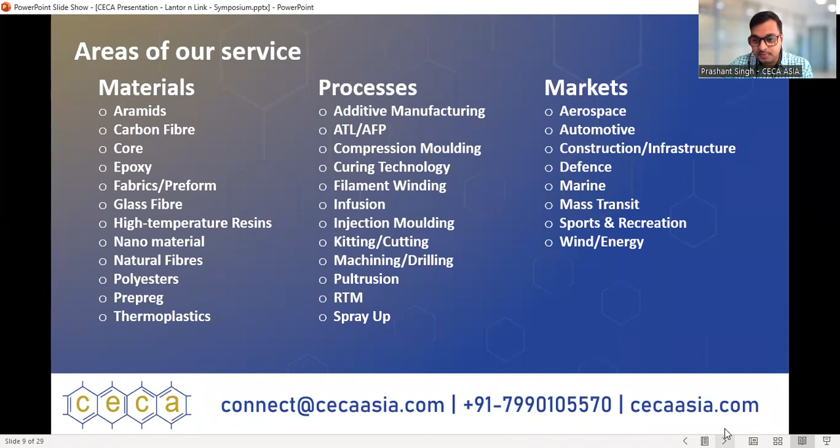If we talk about the markets that CECA Asia caters, it caters aerospace, automotive, construction infrastructure, mass transit, sports recreation, wind and energy, and much more. So this is the core support team of CECA Asia, including Dr. R.K. Singh, Mr. N.C. Sharma, Chindan Kunal sir, Dr. Anshuman, Frank Westy, and Hiral Nair.

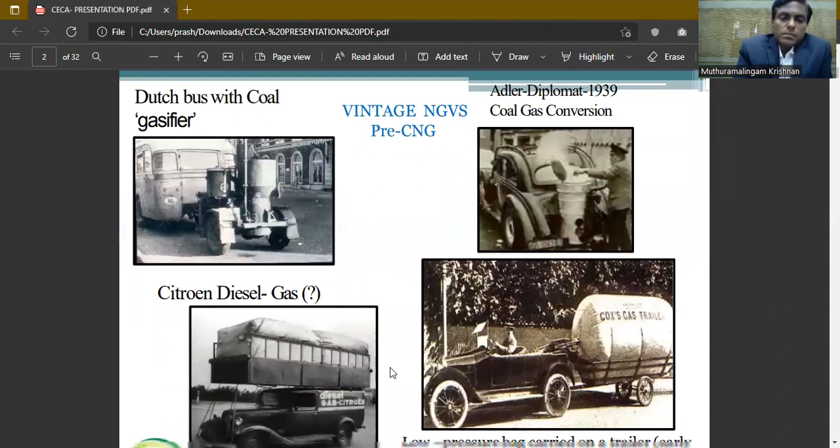When you look at the history of the market and CNG, you can see how we have reached here over the years. You can look at the vintage models and how they used coal gas conversion. Our technology is advanced today because of these vintage technologies that were implemented.

Now we are using composite cylinders. The first Type 4 cylinder was used in rocket applications in the 1960s, and in 1992 it was used in cars. So composite Type 4 cylinders; this is the way it has grown, the growth witnessed so far. Next slide.

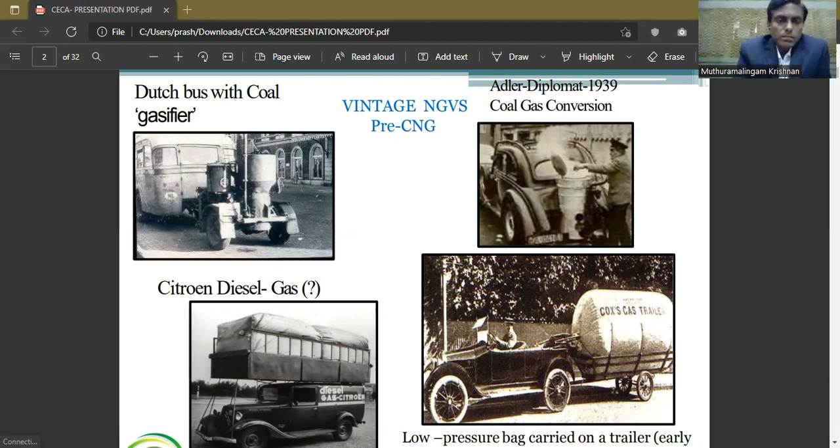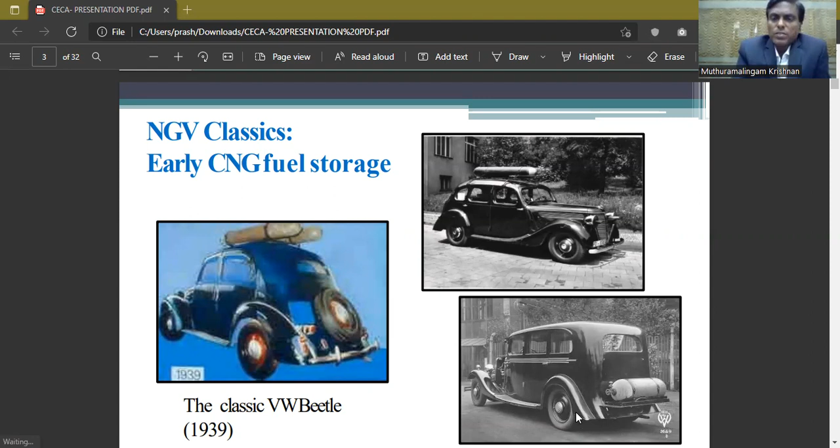Next slide, please. You can see the CNG fuel storage tanks. They used to keep it in metal ones. You can see in 1939, in those days, the heavy weight and how people drove with those gas storage tanks. It has come a long way. Over the last almost 80 to 90 years, we have seen them using gas storage systems. Next slide, please.

So this is the main type, whether it's a Type 3 or Type 4, so composite cylinders. Nowadays we have to go with carbon fiber. We cannot ignore carbon fiber at all, because it reduces the thickness and gives very good properties.

The carbon fiber properties: high modulus of elasticity, high tensile strength, high stiffness, high corrosion resistance, high fatigue strength, low thermal expansion, low weight, low weight-to-strength ratio, high electrical and thermal conductivity in longitudinal directions, and high chemical resistance against acids, salts, and other solvents.

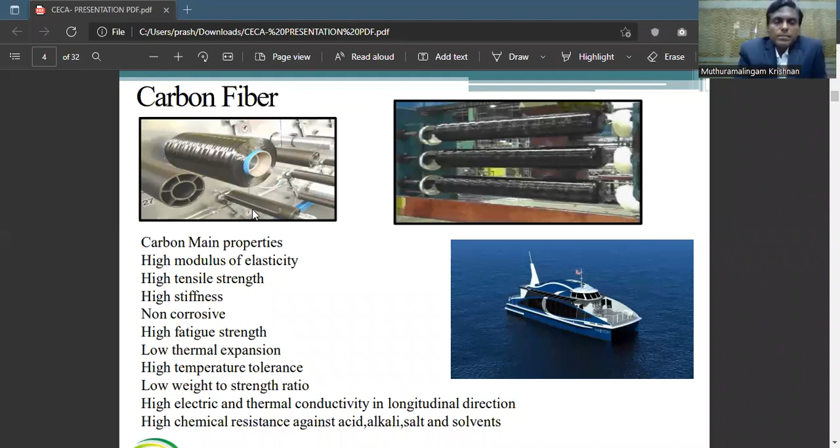They're expanding by 2026. At that time our demand will be five-fold what we have at the moment. Carbon fiber manufacturers have already invested in their manufacturing plants, and the expansions are taking place at the moment. Carbon fiber manufacturers will be able to cater to the market for automotive applications as well as the wind turbine industry. So we don't have to worry about carbon fiber shortage at all. Such steps have already been taken by the companies.

So these are the main companies, particularly for carbon fiber manufacturing. Below you can find the leading players for Type 3, Type 4, LPG, hydrogen, even CNG composite cylinders. You can see Hexagon Purus, Hexagon Composites. They are dominating the market. I can cover them in forthcoming slides and explain about that.

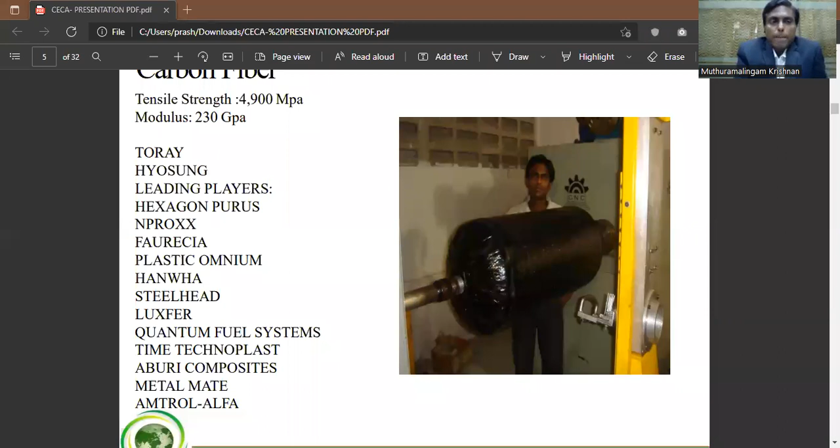That's our next slide. Yeah, these are the types. We knew about only four so far. In the last 3-4 years, the fifth one has come: Type 4, Type 5. So I don't have to explain in detail. Type 1 is all metal, Type 2 is only hoop wrapped, and Type 3 is fully wrapped.

Aluminum or steel based on your designs. Type 4's inner liner is a plastic body. Based on your design, you can wrap it entirely with glass fiber, or carbon fiber, or a combination of carbon and glass. The fifth one is linerless. This has come up with a lot of new ideas. It's still in the early stage. We cannot comment. I don't want to make any negative impact on this design.

We are still welcome for Type 5, but immediately you cannot see it in the market. It might take 5 years or even 10 years, because Type 4 took almost 20 years more for the Indian and Chinese market to adopt this technology. Type 5 might take years, but still we are welcome.

We have to access the technology in such a way that it is the future. Usually people used to think only about metal. Now we have Type 3 and Type 4. Type 4 is also the same. We cannot see Type 5 cylinders on the road in the near future, but it's still in welcome mode. So that's our next slide.

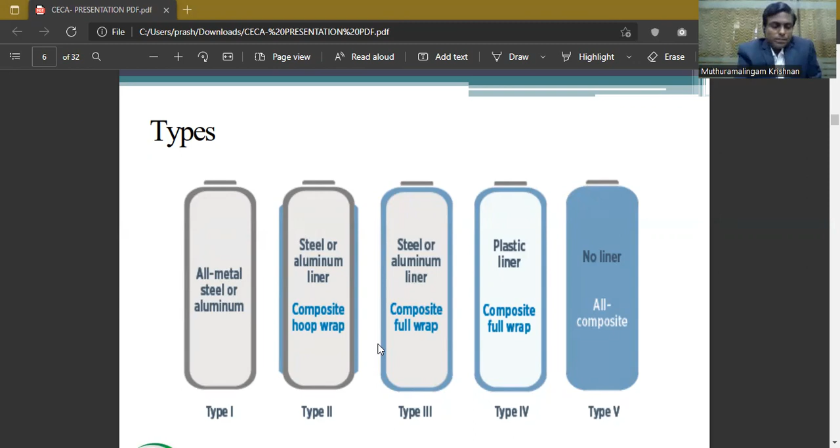So this is the one. The key advantages of composite cylinders: cylinders made of composite have lower weight compared to the conventional one. Another is excellent corrosion resistance. Composites have better dimensional stability over temperature fluctuation due to low coefficients of thermal expansion. Suitable additives can impart very good fire retardant properties in composite cylinders.

Certain things a consultant or any company cannot reveal: what kind of resin system they are using, what hardener system they have, whether thiol-based hardener, or aliphatic, aromatic, anhydride-based. Everything we cannot reveal. When a company starts a new design, first they have to design and do all the analysis, and only after that can they go for development and make a prototype.

With the prototype, they have to go through a couple of iterations. Straight away you cannot make a successful one, particularly in this segment. If you go with a low investment and compromise on so many things, you'll be reaching 60% of your optimum point, but 30 to 40% will still be lacking because you compromised on other things that we'll be discussing in coming slides.

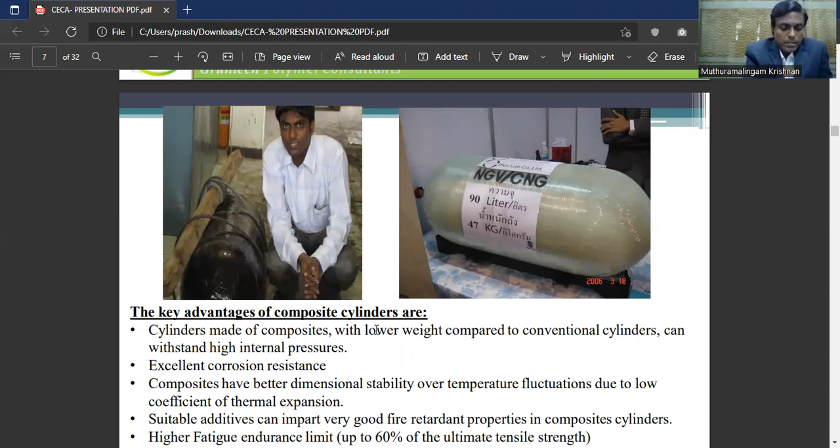Weight ratio. You can see the Type 1 metal cylinder is 1.2 to 1.5 kg per liter, Type 2 is 0.7. It is standardized; you can add plus or minus 5 to 10% for improvements in the design, even improved metals, some improvements that took place in the last 7-8 years. Keep in mind 0.3 to 0.4 kg per liter for Type 3, and Type 4 is 0.35 to 0.5 kg per liter.

For Type 4, if you want better impact strength, you need to have glass fiber on top. The ratio is 80:20, some 70:30, 60:40 based on your design. Some go for 50-50. I made a tank with glass fiber alone and we passed 8,500 psi, but the thickness is very high. It will take a couple of hours of winding.

So you imagine, with glass fiber you can reduce the costing. You don't have to depend on carbon fiber, but you can make the cylinder. But to pass 100% of all the tests, homologation tests, glass fiber is not at all sufficient. You can make it, but it's not a high factor of safety. Keep in mind, with high thickness the winding time is high, so imagine the labor costs and electricity costs that add up. That's why carbon fiber.

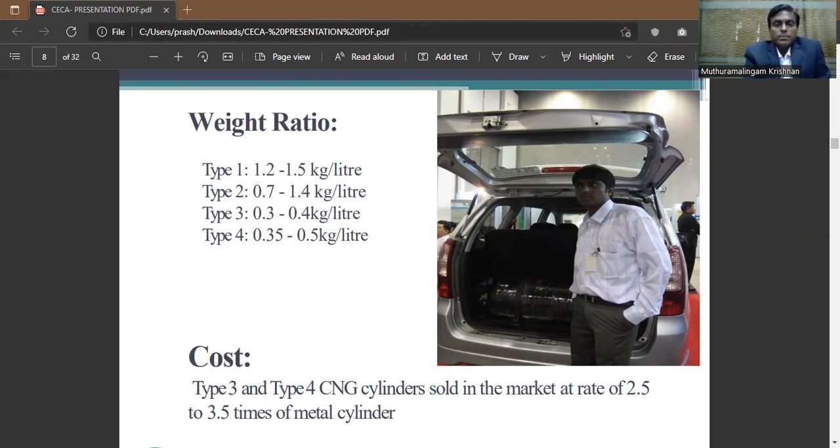So Type 4 cylinders, you can see the liner plays a very big role. For example, when I look at all this last 15 years, we had a meeting with more than 60 customers, most of them multi-million dollar companies. Sometimes with low investment, they come up with it, saying I want to start a project for low investment. I said sorry, I don't want to take the project because I know the result where it will go.

Because already I had experience with a low investment project, so we have to compromise a lot of things. That's why I tell them, if you go with this investment, you will not pass all the tests, you will not be in the market by your third year. Otherwise, I know a company that did a couple of tests in Europe and US also, even 2-3 tests they've done, they're still not able to pass it. They're still struggling. I know companies that have been trying for 15 years with the same thing.

I know companies that come up with the only focus: can we make it ourselves, we do roto molding, we do liner, we are manufacturing, so we don't want to go with the three-molder which I mentioned, the three pieces like extruded tube and then two injection moldings. So it has to be well made. This is what the second composite players and everyone knows, they started with this technology and made very good success in the global market.

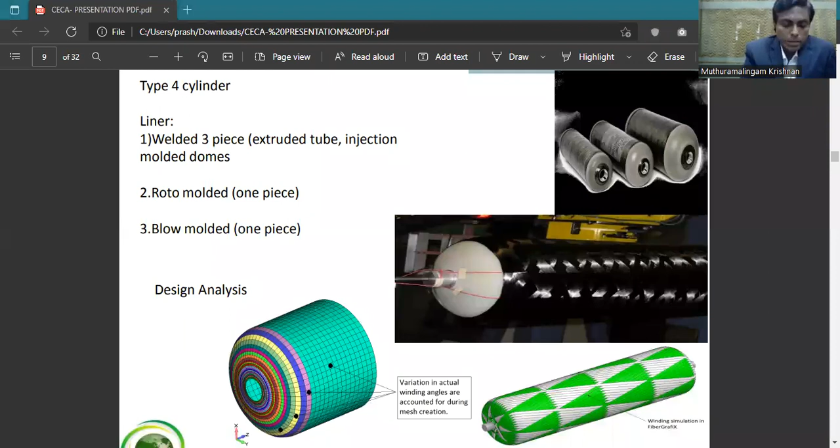Next slide, please. That's on the next slide.

You can see the sizes. Now, when you start this project, don't aim to say you can make the tank in just 2 years, or that you can make 5 number tanks. Just take 60 liters, 70 liters, or 90 liters based on requirements.

Particularly talking about CNG, not LPG - that takes a long time, so I don't want to get into it. Most people are aware of the LPG market. So you can see you can take 60 liters, 70 liters.

Before starting the project, you can have a discussion with the OEMs. If you have well-reputed companies, they can easily convince the OEM. You can update every segment of your project to them. That's how you have to go.

Focus on one cylinder at a moment. For the same liner diameter, I can increase the length and then go with other tanks - that's a later stage. For the first 3 years, you have to focus on only one cylinder.

When machinery is ready and the project funding is ready, you have to spend initially on the machinery, design, and everything that takes place. So in 15 to 18 months you can complete all the approvals - maximum 18 months, though in certain cases 15 or even 12 months is possible.

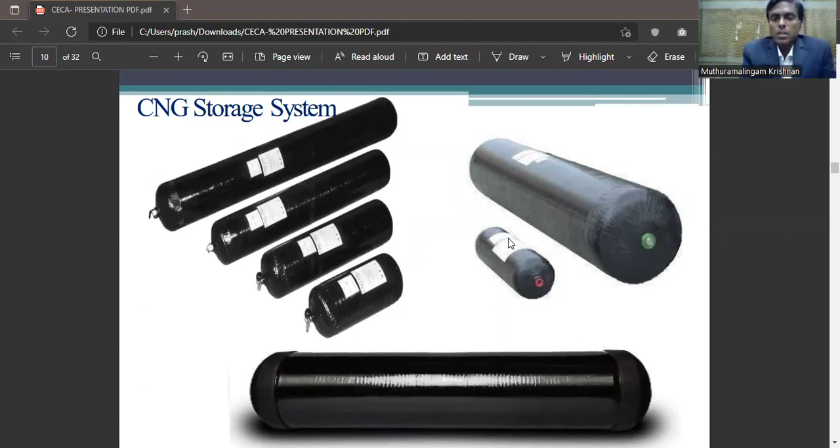Some of the accidents which took place in all this learning, there are not much, but there are sizable amounts of accidents in the US, China, Korea, Japan, France, and other European countries, and in Asia too. You can witness a couple of them.

So such accidents took place, and most accidents in the US, Europe, Korea, and China occurred because the composite cylinder did not rupture at all due to other failures. It may be various factors. The cylinders got approvals, local body approvals and everything, and homologation norms in the manufacturing process were followed, but inspection was not done properly, or the valve might have been changed. Various other factors were the reason for accidents.

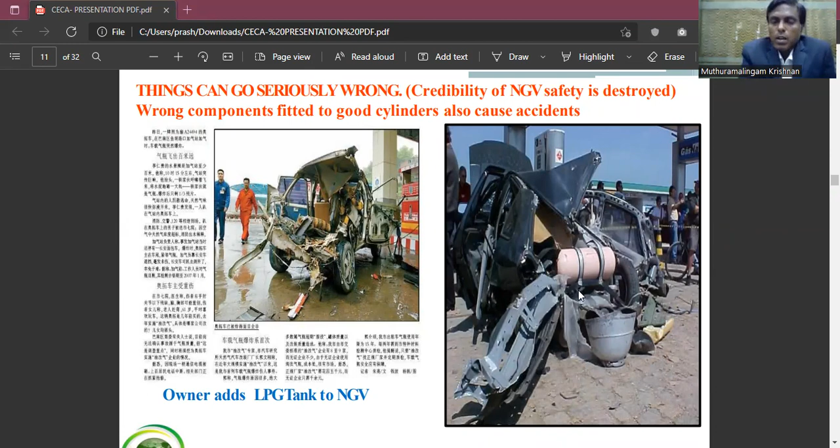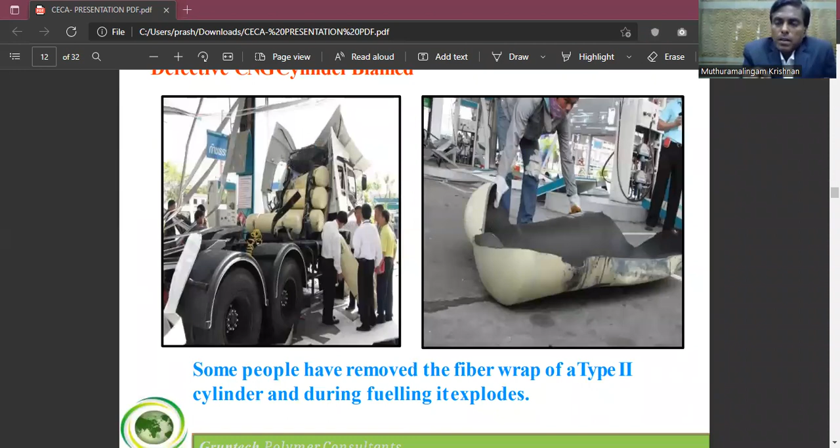If one cylinder blast happens in the market, the people, government authorities, or OEMs will hesitate to talk with your company for the next order. I know companies for LPG, it took many years, I met them in person. Certain things didn't work out, and I didn't want to take up the project from them. They started with the projects but still had some issues. It took 5 to 6 years for them to get into the market properly.

It will release gas instead. The gas will vent out like this, whether under overpressure, bonfire conditions, or even bullet penetration, it will release the gas but not rupture. That is the safety aspect, the IS safety of this type of composite cylinder is good.

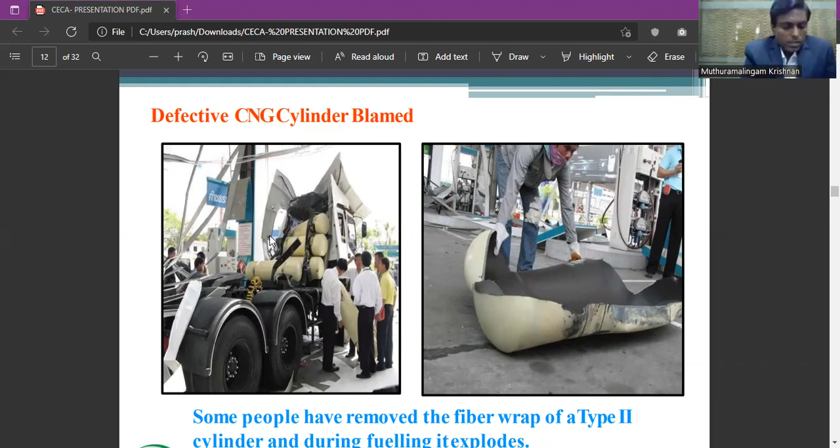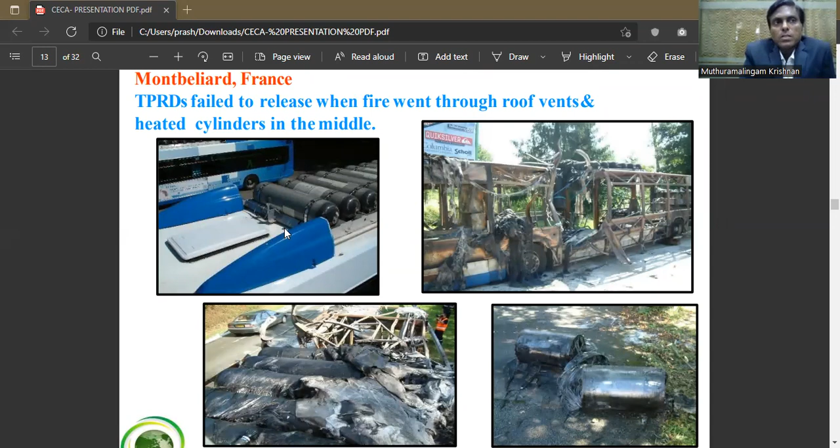Next slide. You can see the bus roof with a lot of cylinders mounted. The thermal PRD devices failed due to the fires. When the fire took place, you can see the cylinders didn't rupture at all, the gas vented out and caught fire, but the cylinders remained intact. Next slide, please.

Carbon fiber has very good tensile strength, 4,900 MPa, and modulus 230 GPa, compared to other available fibers. I tried with basalt fiber also, which is very good, as good as glass fiber. But when it comes to carbon fiber, not only is the price high, we are spending a lot of money on it, but the performance relying on carbon fiber is significant, particularly for this part.

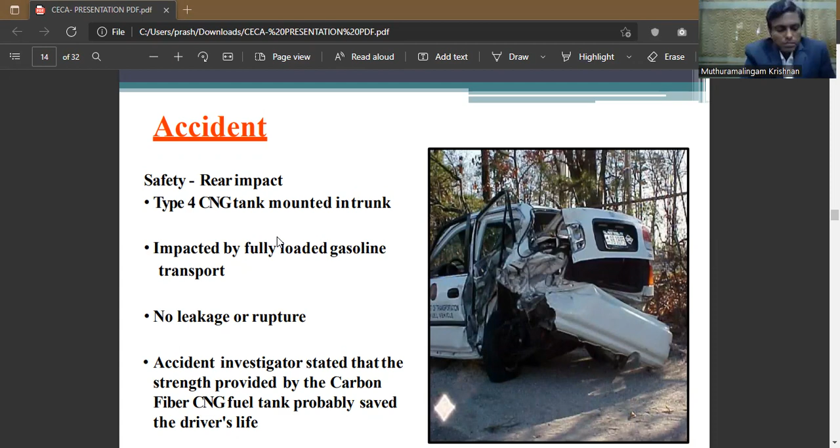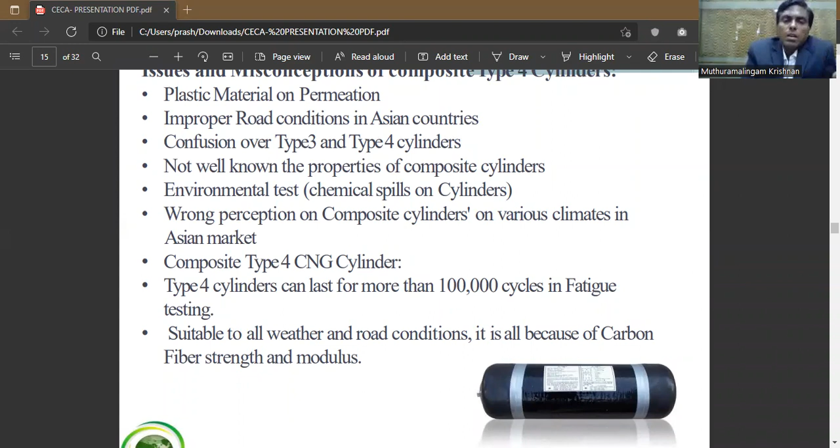Next slide, please. Mainly there are misconceptions that have taken place over the years, which I have observed, regarding the material, plastic material, and permeation. This is most of the major issues recently, all the developers are having these issues.

What is happening? The permeation level is there. You have to understand one thing. Even for plastic pods, there is a limited permeation level. For example, when you go with no permeation, like I can explain in one of the slides later. Based on the permeation, some companies, even though they got approval and everything, delayed the process and production to get orders. So they face such issues with permeation.

This is very important. So not only does the material have to be in such a way, the permeation has to work out. If you go into so much detail, that can only be project based. Only then we can explain and talk about it.

Improper road conditions. Yes, why India and China? China also, okay. India stayed a bit behind in those days. Indian roads are in such a condition. We have connectivity through the whole of India, but with our road conditions and everything, the belief was that only metal cylinders can withstand everything and composites will not withstand it, when you have speed breakers, some holes, and roads that are not even.

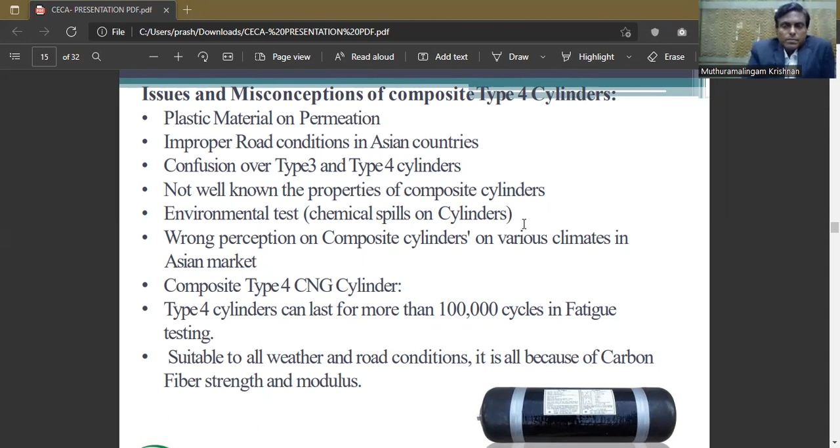So next slide. Next I'm talking about economic efficiency. You can see the steel cylinders on the carbon wrapped, CNG cylinders. You can see the economic efficiency. So next slide.

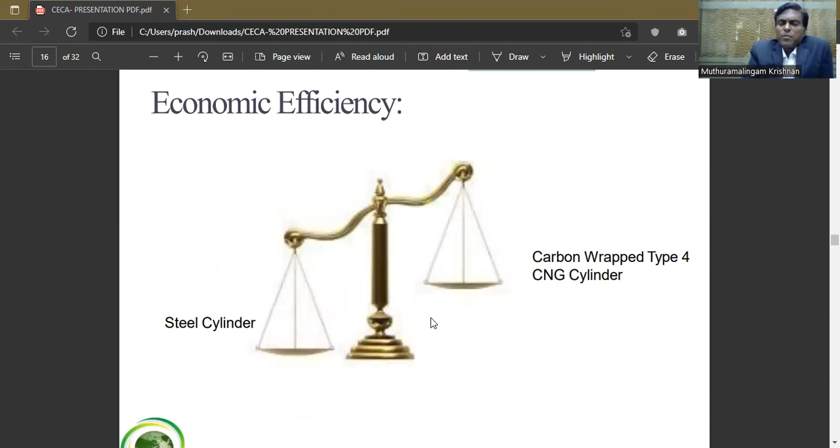So now the industry is adopting these types of cylinders, mainly buses, trucks and heavy duty vehicles, even marine applications. They're using these types of cylinders now, so the market is expanding. On one side is carbon fiber. The carbon fiber requirement is huge.

Already the carbon fiber manufacturers have taken steps for expansion, to have more carbon fiber available in the global market in another 3 years. Toray is taking such a step. All the players are taking such a step. So it's going to be a 5 times increase.

We have a sizable amount of required demand for carbon fiber for type 3 and type 4 applications, LPG, CNG, hydrogen all together. So you can imagine it's going to be increasing 5 times by 2026, 27. Imagine that kind of requirement taking place. So next slide, please.

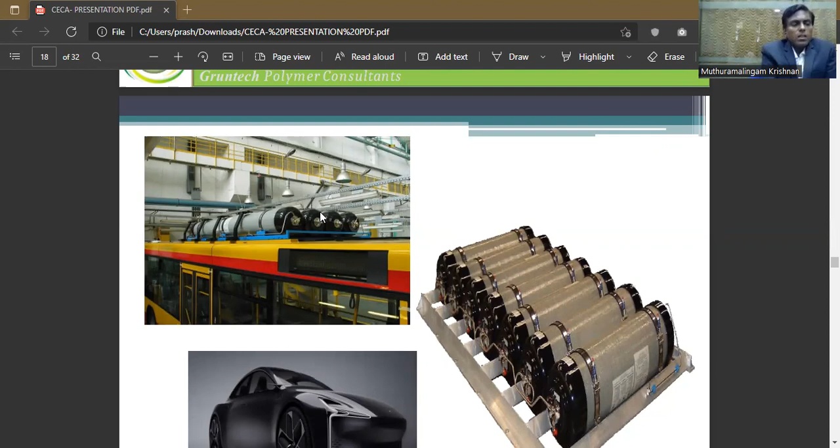So next, in economic efficiency, there are a lot of points. Since there's a time constraint for the presentation: in India, the transport cost of CNG within cities can come down from 10 rupees to less than 6 rupees, 5 rupees, or 4 rupees. You can keep it at just 5 rupees per kg by using carbon fibers. And more than double the quantity can be carried in less than half the weight.

When you use composite cylinders over metal cylinders, you can imagine you have to carry the metal cylinders' weight also. Whereas if you're using this, maintenance can be reduced. Tires get replaced at 65,000 kilometers against 15,000 kilometers earlier. Now Asian countries have started showing interest in composites.

So this is tires. You don't have to replace your tires compared to metal, with that kind of weight. And the composite cylinder payload capacity, you can imagine how much cost is saved. Next slide, please.

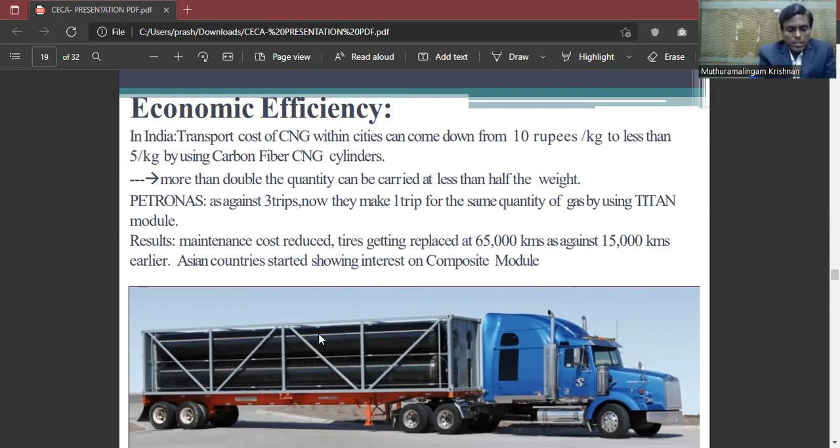So this is a CNG vehicle, bus and car. It's just a comparison, don't get too much into the rating and everything. Compared to steel, you can see 1000 kg, 300, a difference of 700 for buses. Car, 120 liter water capacity, steel is 110. It can be made under 100 kg also for steel. I'm just putting a figure.

45, you can see the difference. Actually, 70% cost, with these types of technologies, carbon fiber. So you can see the demand. To deliver a customer 1 kg of CNG, the steel trailer must also deliver 6.6 kg of steel, whereas with composite it comes to only 1.47 kgs. You can see the differences by using composite cylinders. Next slide, please.

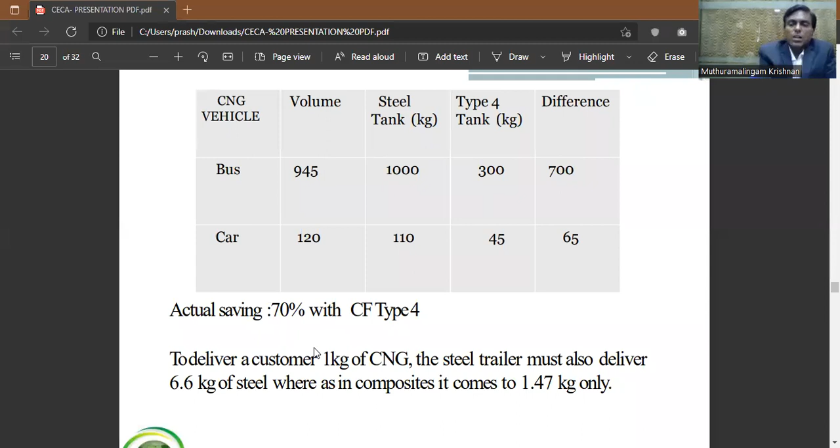So this is North America. 90% of buses run on Hexagon composites' Type 4 cylinders, in North America alone. That means they are a dominant player. There are other players out there. I'm not saying their products are not as good. Their products are also good. Their tanks have been used in rocket applications and other space programs.

But why am I talking about this company? They have a marketing team, and they keep on updating the liner material. If anything needs to change in the liner, they improve it. They improve the technology. That is where they work.

From 2003 onwards, when I interacted with people from the company in 2004, at that time itself they were meeting companies in China, the OEMs in China, OEMs like Ashok Leyland in India, and other players.

So you can imagine, years back itself they started to get into the market by 2022. So that kind of continuous vision should be there. Then only, once your prototype is ready and approval is ready, you have to get into having meetings with the OEMs. There will be a couple of players, but all the players cannot offer the number of cylinders. You have to keep that in mind and work it out that way.

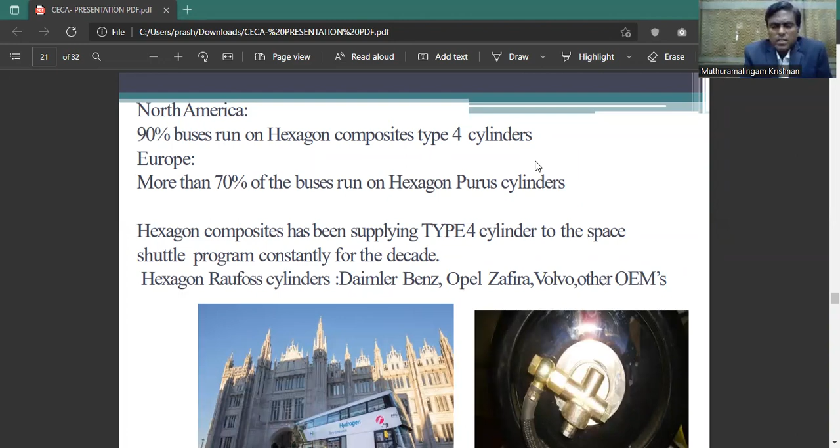So with Hexagon Composites, most of the OEMs are placing orders. They have a tie-up and collaboration with them, and day by day it is increasing, whether it's Hexagon Composites, Hexagon Purus or Agility, whatever it is. Next slide, please. That is what I'm telling. You can see there, I don't want to say the exact number, but almost close to 18 to 20.

18 to 20 million LPG cylinders are already sold. You can imagine their profit margin. They were able to sell 20 million cylinders in the market, so in forthcoming years you can see how much demand will increase. They will get 3 times the business for LPG cylinders alone for home kitchen applications. So you can imagine CNG as well as hydrogen. They have already entered Asia Pacific, a region they focus on.

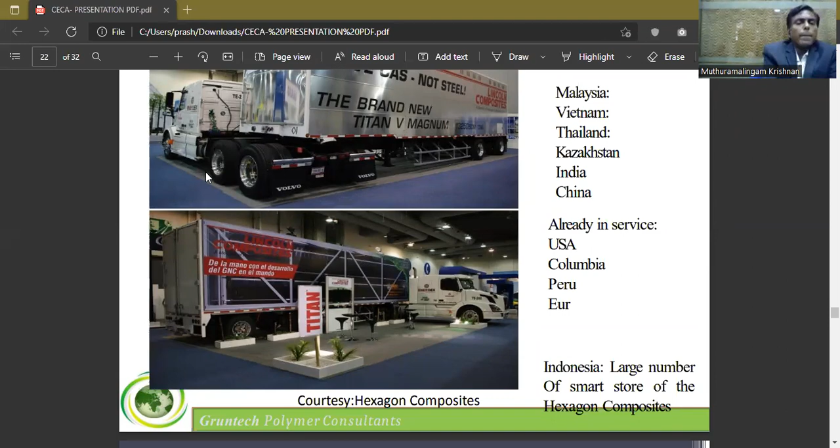Next, this is a Titan tank. So you can see. So next slide. The forthcoming slide, you can see the next one. This is where Hexagon Composites stands tall in this segment. You can see 10,000 cubic meters capacity. There are other variants also.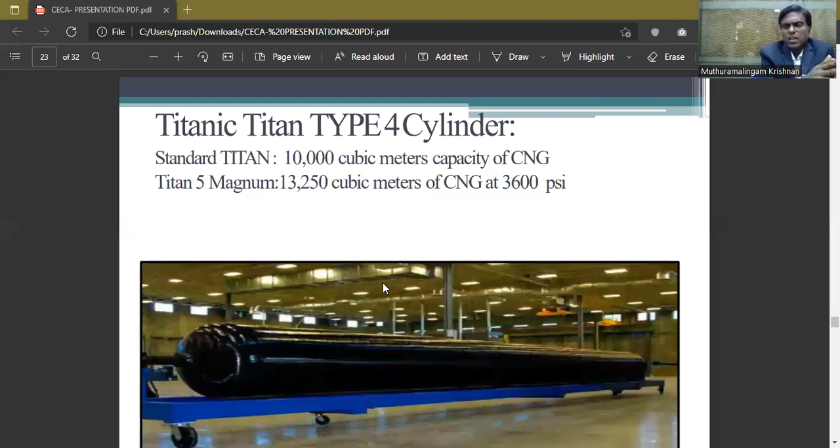So now let's move on to hydrogen. Hydrogen is important. You can see a lot of investment is taking place toward 2050. It is expected $10 trillion of investment is going to take place in hydrogen fuel cell related projects. You can imagine how much investment is taking place. Companies like Fortune 500 companies, petrochemical companies, OEMs, all are investing in electrolyzers, green hydrogen production, even some into ammonia, green ammonia, some into methanol.

So a lot of investment is taking place. You can see, 2 to 3 years already started. A lot of expansion, 5 gigawatt or 10 or 20. So now you can see hydrogen, what hydrogen is generally. Low carbon hydrogen from water electrolysis using renewable power is green. This is what green hydrogen is.

The next one is low carbon hydrogen from water electrolysis using nuclear power. When you're using nuclear power for producing hydrogen, that is called pink. Low carbon hydrogen from natural gas using reforming with carbon capture storage, that is blue. Low carbon hydrogen from coal gasification with carbon capture storage, that is purple. So it is based on the color.

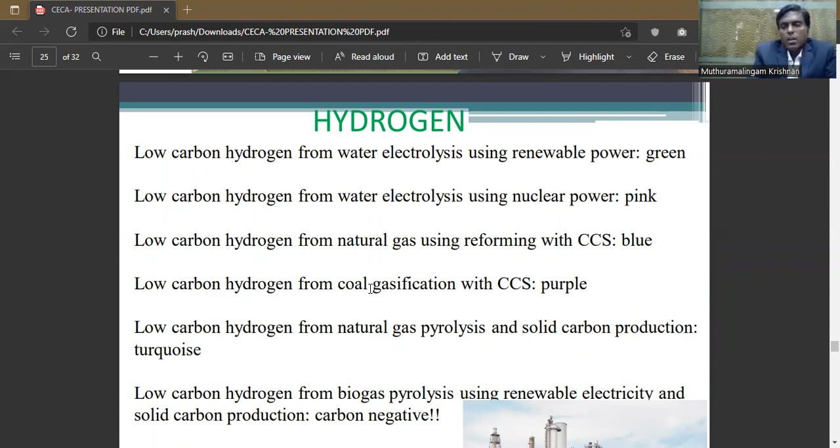Another one is low carbon hydrogen from natural gas pyrolysis with solid carbon production, that is turquoise. The other one is low carbon hydrogen from biogas pyrolysis using renewable electricity with solid carbon production, that is carbon negative. So next slide, please.

So this is fuel cells. Now we should not say it's against electric vehicles. Those who are in the fuel cell industry, they will be bashing the electric vehicles market. No, it is not such a thing.

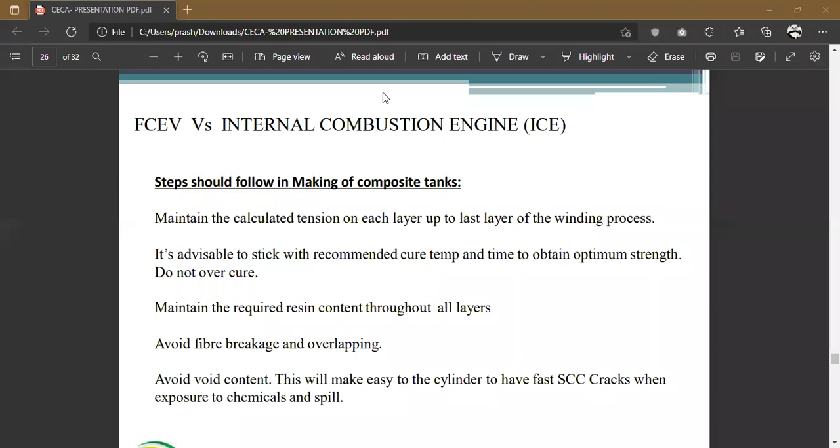Give us a few minutes, guys. There's some issue with our speaker. We'll get back to you in a few seconds. Thank you for your patience. Sorry, audience.

When you look at the fuel cell, you should not be bashing the electric vehicles. It is not battery electric vehicles versus fuel cell vehicles. It is against internal combustion engines. So you have to categorize these two in such a way, because electric vehicles should grow simultaneously with fuel cell electric vehicles. The path should be there.

So we should not say what will happen if the battery gets damaged, what happens if a short circuit happens. That will be overcome. Hydrogen is zero emission. That is our concern. So we have the market. Hydrogen is going to be the future, that is for sure. But people who want to have battery-based electric vehicles, let them have it. Let them have the flexible drive.

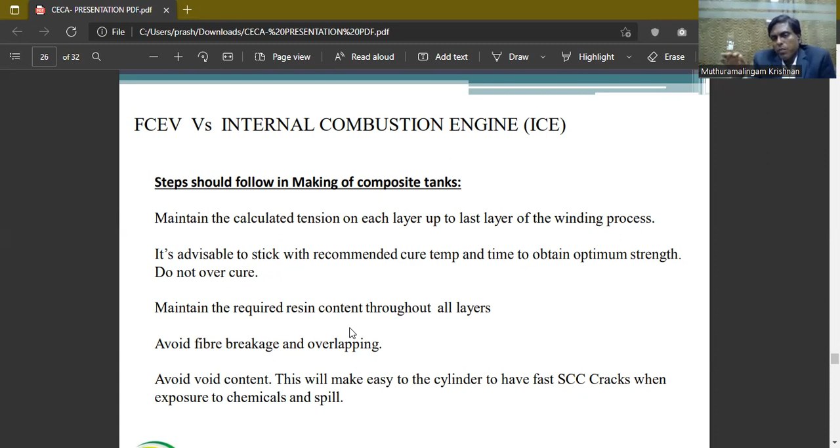When you have voids, when the tank is fitted in the car, after 2 or 3 years some chemical, kerosene, some resin, some solvent, the driver will keep it near the tank. Some chemicals will attack it. Even if the top layer has any voids, it goes inside the void. That will become a weak point. Over a period, automatically it will have issues, and your tank's performance will be reduced.

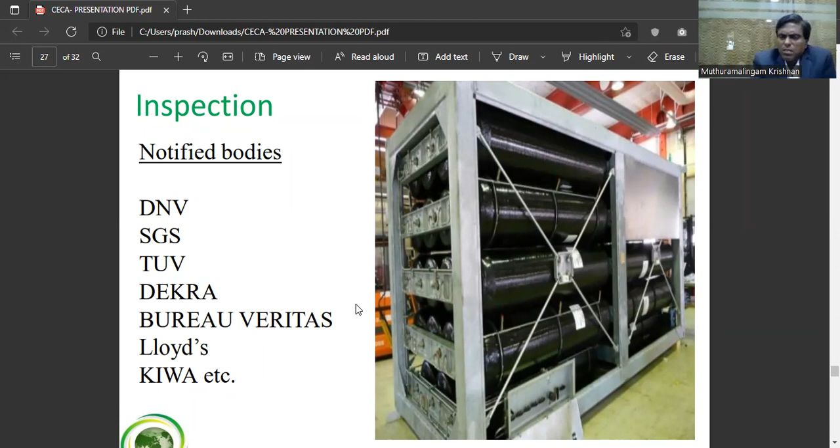So next, look at the next one. These are the notified bodies. When your design is ready, simultaneously you have to deal with these notified bodies and local authorities in India, China, and local body authorities. These are DNV, SGS, TUV, DEKRA, Bureau Veritas, Lloyd's, Kiwa and others. There are so many more. I want to show this one.

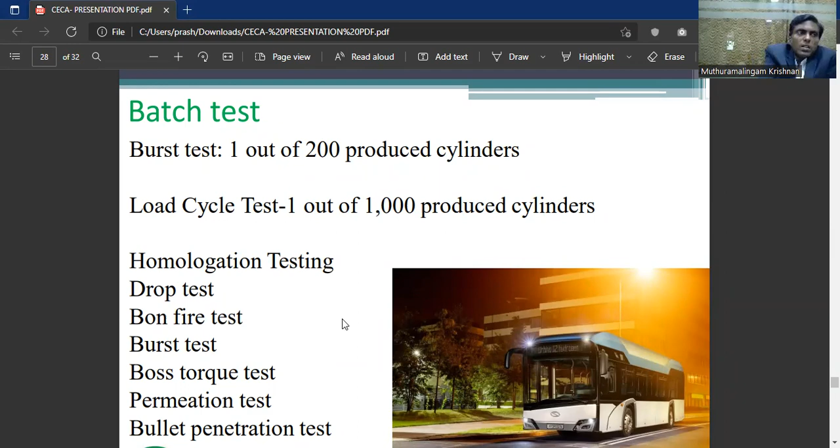The next one is from my experience. No compromise on the following factors. First one, listen. Some people say I can have a cheaper rotational molding machine, like 1/5 of the market cost, or we can use a used, old one, make some changes and make a liner. Don't compromise on the machinery. That is my humble request. If you compromise on the machine itself, 20% is gone. Next, raw materials.

Some people say, why not use vinyl ester, why not use polyester? Don't compromise on the resins. With the epoxy system, you can try others, it's not that you immediately have to go with epoxy, but most of the players are using epoxy systems. Thermoplastic liner: you can have other materials like CPVC. In coming years, a lot of research is taking place on other liner materials. We can expect more reinforcement with glass, aramid, carbon fibers.

That has to be based on your design again: how much thickness you need, how much water capacity, how much gas you hold, whether 2 kg, 3 kg, 4.6 kg or 9 kg of hydrogen at 350 bar. It depends on your design. Then you have to go with that.

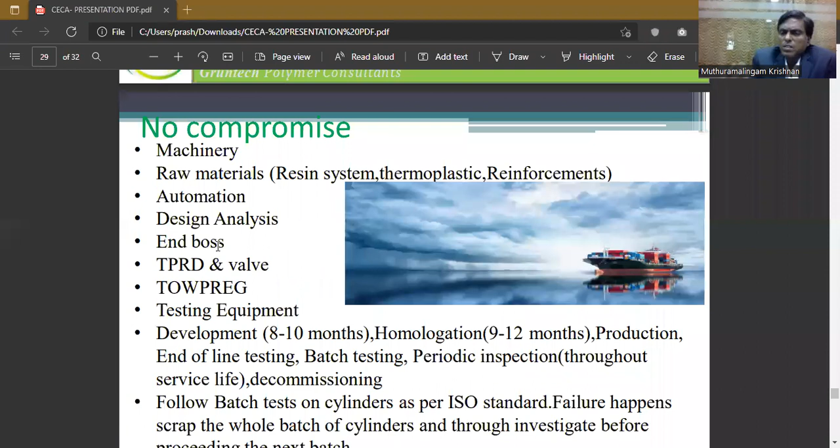Material quality has to be checked. The resin system has to be checked. Gel timing is what we discussed. Everything, including the fiber, has to be checked, and only after that can you make a conclusion.

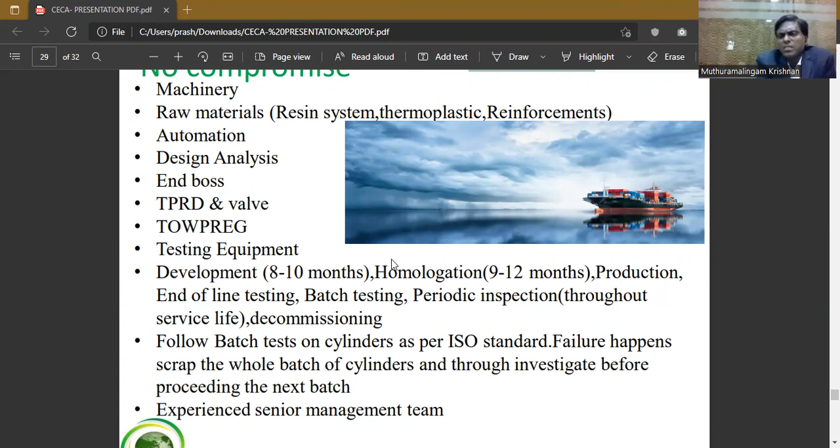Next, the future trends - you can see hydrogen, which we have already talked about. Now, for the future, this is my observation.

I'm working on a couple of things in the project sector involving bioplastic - bio-based polyethylene, which is already in the market. In the next 3 years, orders have been booked by players in the industry for bio-based, not fossil-fuel-based, polyethylene.

Bio-based, bio-source materials - nylon is already in the market. PHA, polyhydroxyalkanoates, is very good and you can try it in the future. Then furanic chemistries - furanic polymer biopolymers - are already coming into the market.

Another one is bio-based acrylonitrile. The good point is acrylonitrile is the base for carbon fiber, and that acrylonitrile itself can be produced through a bio-based process. That development is progressing.

A lot of research is happening, so in coming years you'll see bio-based carbon fiber from that acrylonitrile, and then bio-based epoxy. Epoxy exists already, like from cashew shell sources, various types.

We've seen this over the last 20-30 years - a long history exists for epoxy. Now the epoxy chemistry and technology has improved, and a lot of research is taking place.

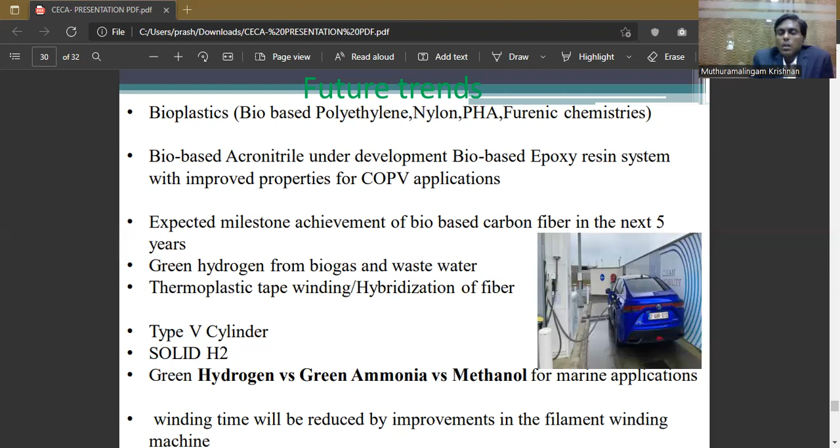You don't have to depend on only one product - various alternative options are available. So we are on the right track. Since the pandemic and other things, the economy is strained, but still hydrogen - if we see next year, a lot more progress will be witnessed in this market.

The main thing I want to see is this - not all CNG cylinders will be there. Demand is there; those producing CNG cylinders are moving into the hydrogen variant. The hydrogen will cost us $40 per kg in some places, somewhere $15 per kg, somewhere $6.5 to $7 per kg, even $3 per kg - that range for production cost. In the market it's double the amount - $7, $8, even $12.

Because it's not a universal pricing yet. But we are aiming for below $1 per kg of hydrogen. We are expecting - that may not be possible, but we can achieve at least $1.25 to $1.5 per kg of hydrogen. That is what I am expecting.

But again, all the leading players have tied up with other partners. An engine manufacturer has tied up with a type of cylinder manufacturer. Various players - already Type 4 manufacturers have tied up to enter other regions, catering to market demand. So that way all the collaboration is taking place. That is a very good move, interesting to see in the market.